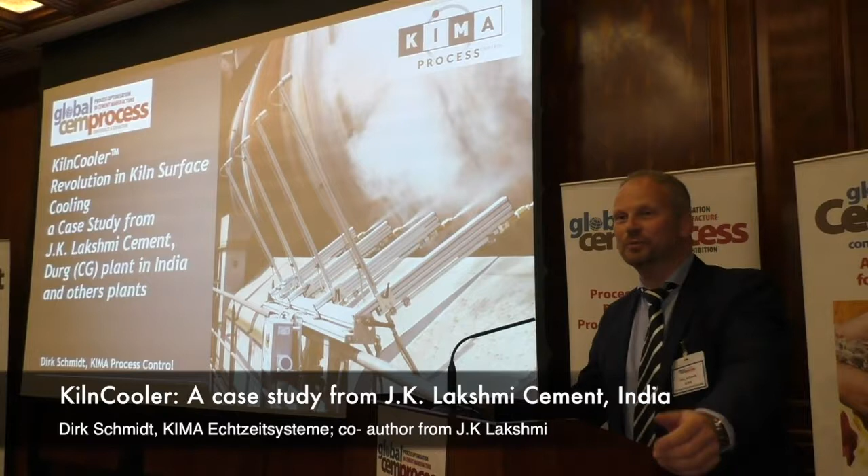Good afternoon. I could wake you up after such good food with my ideas to design wine cellars. I could imagine that would be much better and more interesting, but instead I try to make another revolution.

Very short: who is KIMA Echtzeitsysteme? Thank you, Rob already introduced us. We will be named, starting just next month, not KIMA Echtzeitsysteme anymore, but KIMA Process Control. The reason is simple: Echtzeitsysteme means, in English, real-time systems. This is, of course, a functionality of automation and control, which is good. But if you have 98% export in your company and none of your customers can explain what your name means, it makes sense to change it after 22 years.

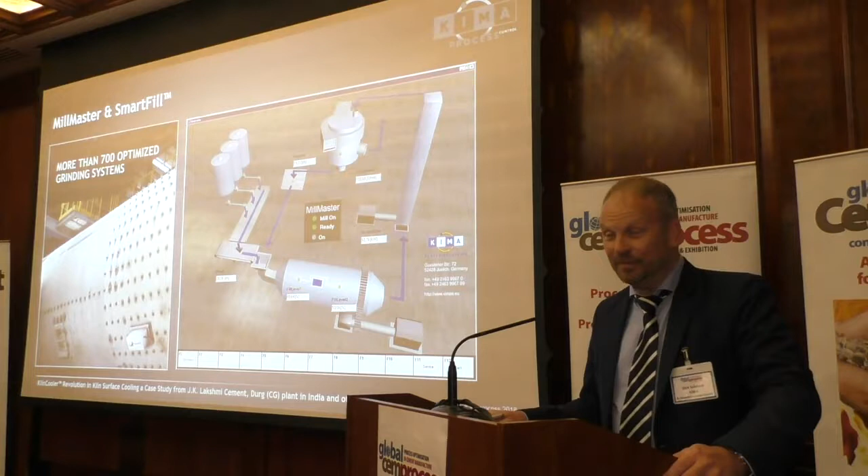KIMA is, of course, well known, as KIMA Echtzeitsysteme so far, for mill optimization. Mill optimization is the core competence we have had over decades in our house. More than 700 optimized ball mills are the result of a very successful software development called MillMaster. MillMaster is one of the software solutions we designed from a software package called Smart Control. Smart Control is mainly based on digital filters, predictive models, but also fuzzy control. We believe in this most robust, advanced process control and still offer it very successfully to the cement industry.

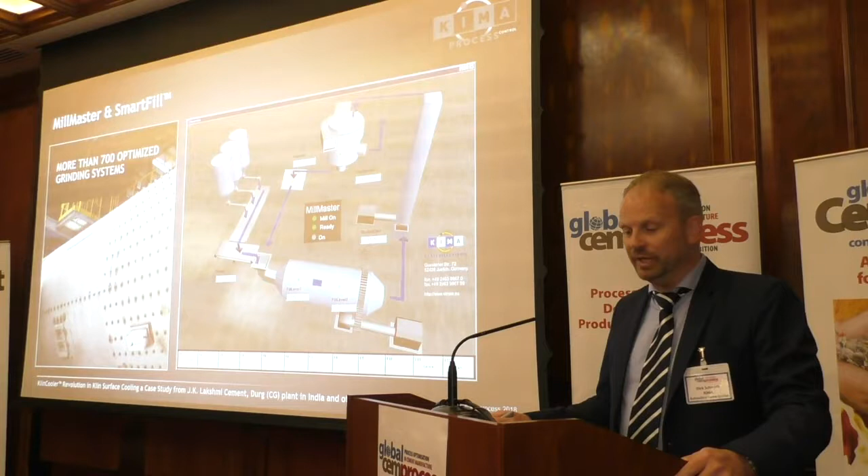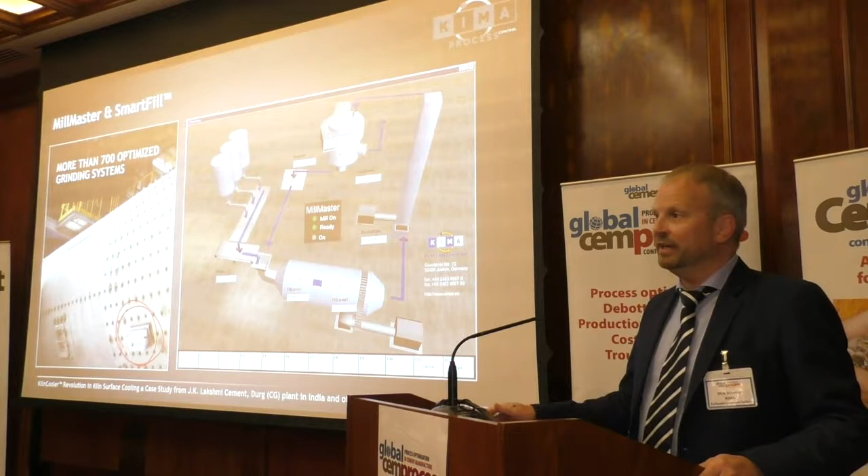We also had the necessity to design new sensor devices. Why? Yesterday we learned from ABB that soft sensors are here and used. Soft sensors are only as good as the input information again. So if you are able to design, based on a new physical function, a better signal, better information from a process, like we did with these smart fill sensors you see here, which are installed on the mill body itself, then you get much more reliable, precise information about what is going on in the mill. We have calculated and shown in many places that the smart fill electronic ear is 10 times more accurate than conventional microphone systems. This was only the introduction of our company.

Coming now to a thing which is obviously happening in more and more cement plants in the world: the introduction and implementation of alternative fuels, AFR.

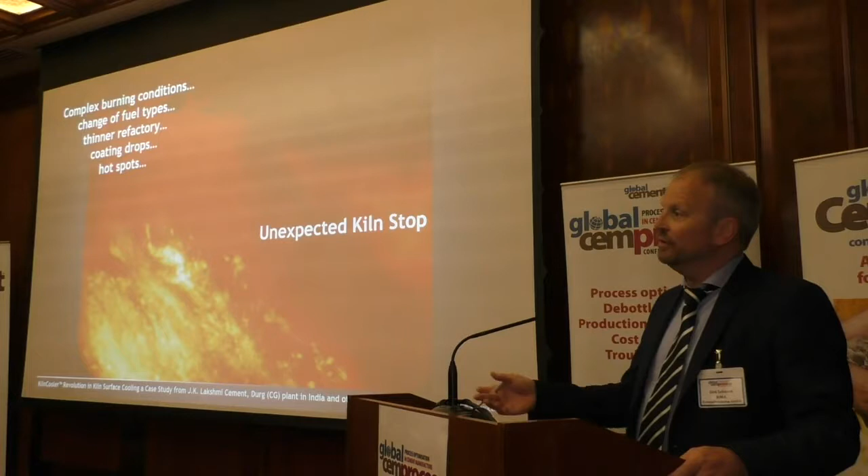It begins with complex burning conditions. If you change the fuel types and change your burning zone behaviors, it often happens that, at an earlier stage than expected, the refractory material becomes thinner. At this moment, the people in the plant are fighting with coating drops. Why? Because the flexibility of the kiln increases. You don't have this stability, this corset of bricks, in your kiln anymore. And then, with these coating drops, you create hot spots, not even red spots yet—the hot spot comes before. I speak about temperatures below 500 degrees, and I will explain why.

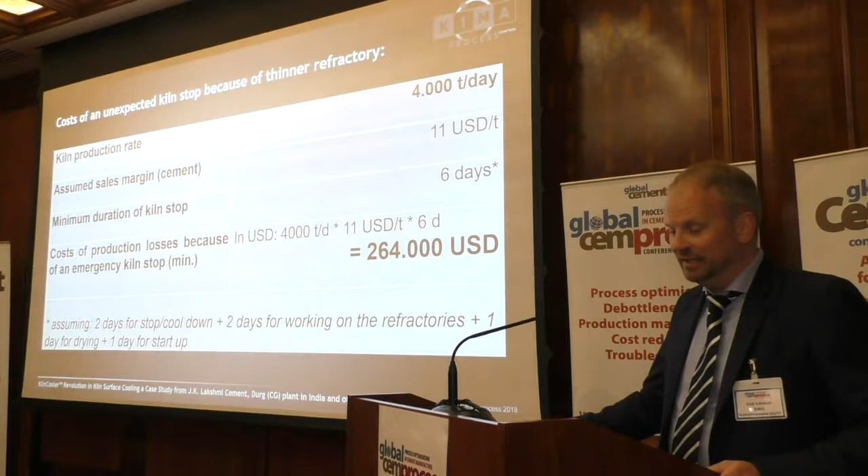If it is above 500 degrees, or even 470 depending on company rules, you are fighting with an unexpected kiln stop. Because if a brick falls out, you are not able to operate your rotary kiln forward—you have to stop it to prevent damage. Such an unexpected kiln stop creates costs, and the main cost is, of course, lost production. With a production rate of 4,000 tons per day and an assumed sales margin in cement of $11 per ton, an emergency stop of around 6 days—or even just 4 days is enough—means we're talking about losses of production of at least $250,000.

However, today, to avoid such unexpected kiln stops, plants are using huge fans, and these fans are everywhere. To protect against thinner refractory, when these electrical fans are in operation, you must fight with very, very high power consumption—I will give an example calculation in the next slide. The other disadvantage of fans is their noise. In Germany we have plenty of plants which are coming closer and closer to residential areas.

The houses come closer and closer to the plants. That, by the way, was the reason that Heidelberg Cement in Ennigerloh, the plant in North Rhine-Westphalia, in conjunction with the German Cement Producers Association, VDZ, decided to contact KIMA Echtzeitsysteme to develop a solution for that.

We did, and I would like to bring you exactly this on the point. What is more efficient than an air fan? Of course, it is water. But water on a very, very careful basis. What we do here is not artificial intelligence, it is artificial rain.

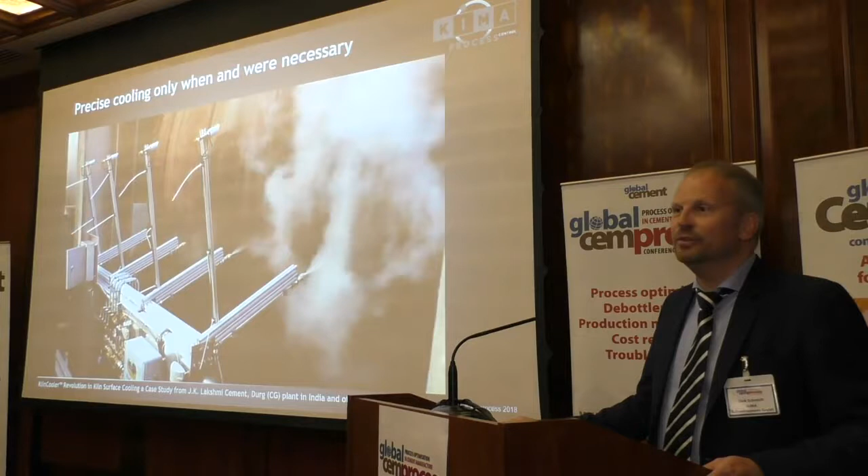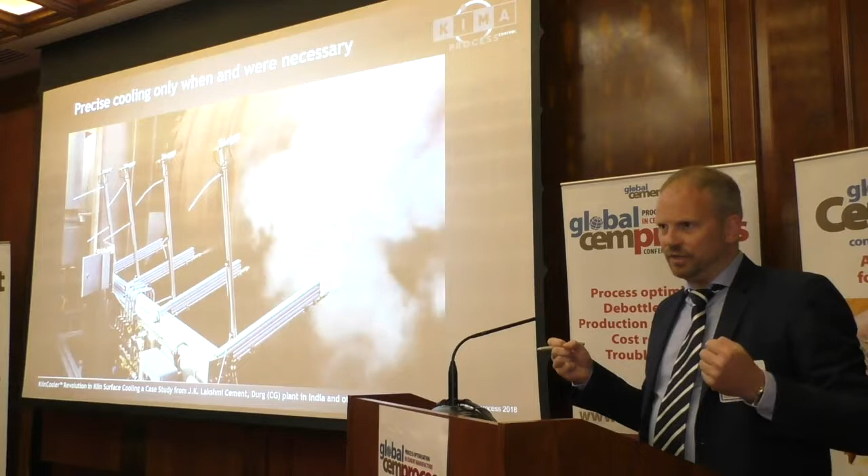We make a very smooth water mist, and this water mist creates on the surface of the kiln nothing else than what we have as humans as sweating on our skin. The water touches the iron and completely evaporates. Only in this moment can we take out the energy. So we want to touch, but with very thin drops, smaller than 1 millimeter.

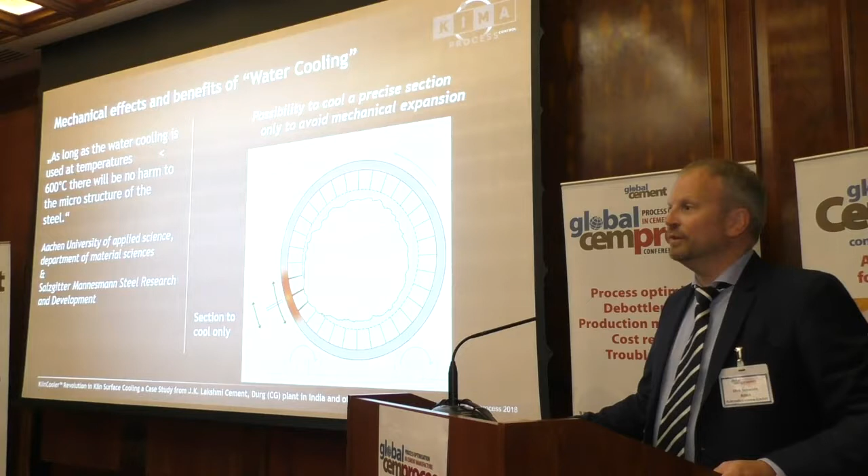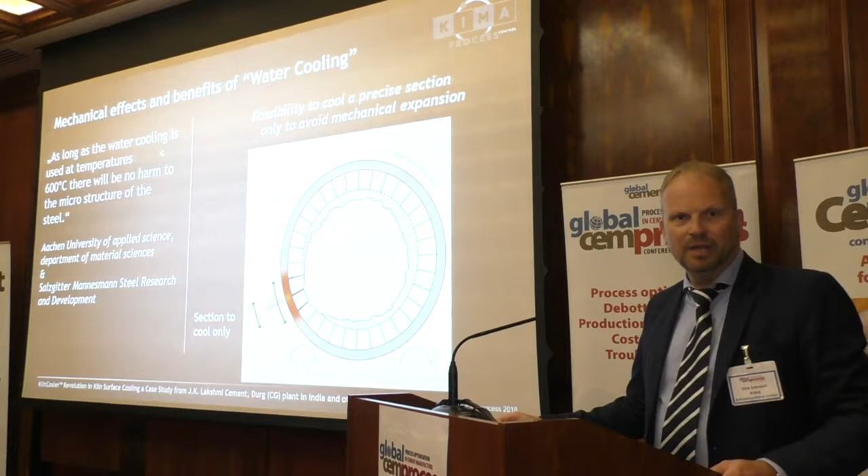This technology offers us a big step, because it first measures the temperature of the kiln shell, so that we can cool only where necessary. In comparison to an electrical fan, this gives a lot of new opportunities. As long as we operate under temperatures of 600 degrees, we are working here with a controller which does not open the magnetic valves over 500 degrees, only to be on the safe side, so we don't cool red spots.

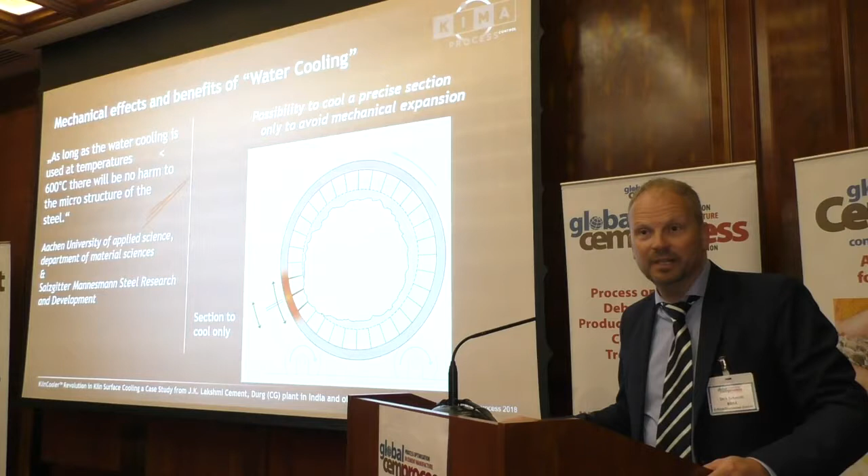You can't make anything wrong. The microstructure of the steel will not be harmed, because I don't know if somebody of you has done mechanical education during your engineering - there was this horrible iron-carbon diagram. I hated it, really. It's everything.

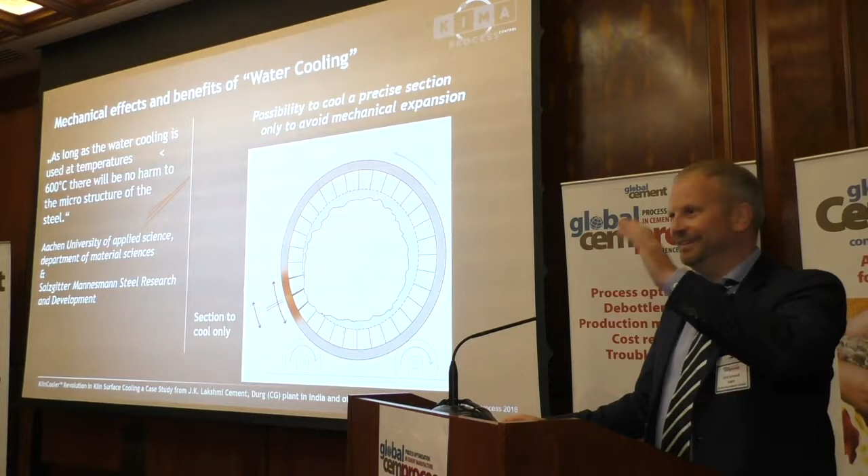Everybody must go through this door. But think about the curves which are there. You know all these names? I forgot them. However, the movement of these curves starts at 640 degrees.

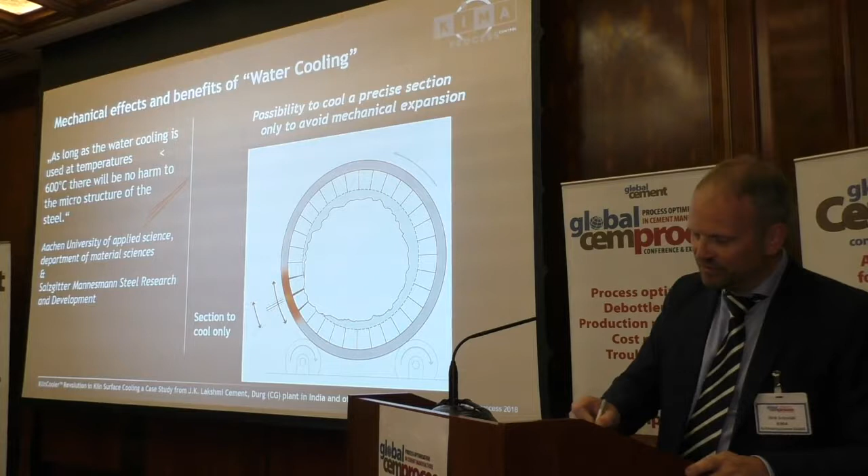Below that temperature, one of the famous German steel producers, Salzgitter Mannesmann, told me, you can cool your kiln with everything - with oil, with water, with air, it doesn't matter. No cracks, no harm, nothing. And whoever says that, it is a stomach feeling, it is not proven technology.

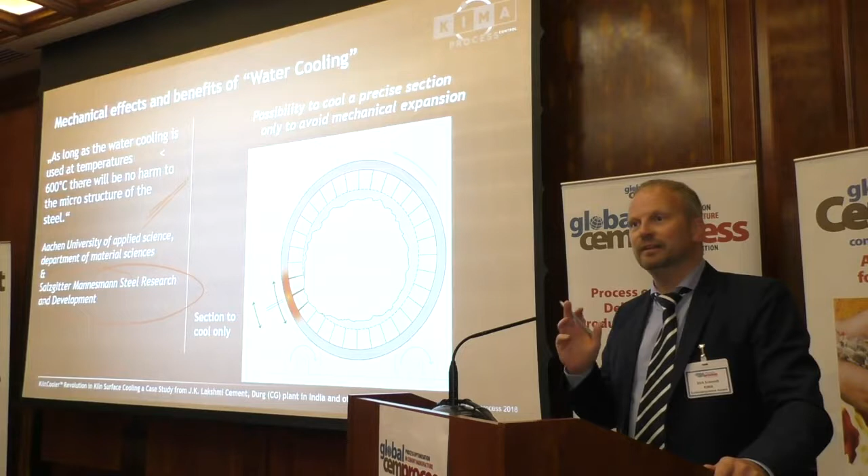We are engineers, and I hear much too often, 'this is danger for my kiln.' Absolutely wrong. So we designed the system more carefully. We don't want to shock cool it. We don't want to cool as fast as possible.

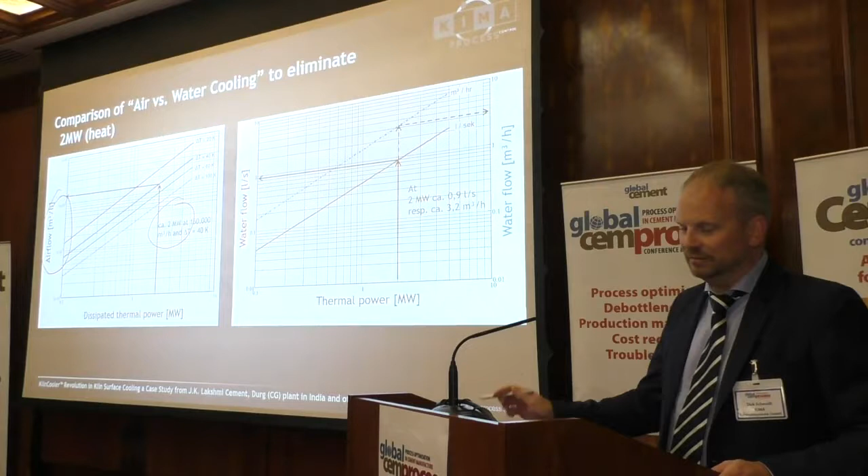If you want to sufficiently cool a kiln shell, we have taken only the air amount which is needed to cool 2 megawatts with a delta T of 40 Kelvin. You need 150,000 cubic meters per hour of air to do so, and you need at the same time 3.2 cubic meters of water to have the same cooling effect, in 1 hour.

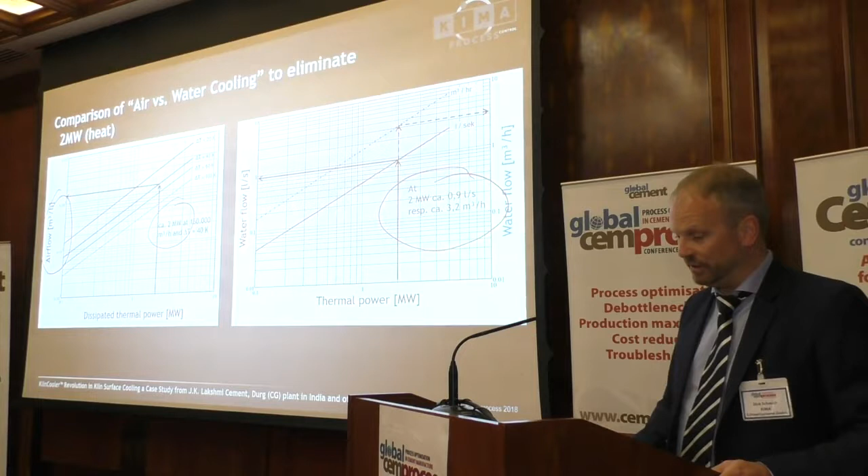Let us make it easier. If you have a kiln shell section of 1 meter and you want to cool it down 40 degrees Celsius, you need an air blower of 10 kilowatts. This produces 3000 normal cubic meters of air. It has a noise of 105 dB. Try to imagine how loud this is.

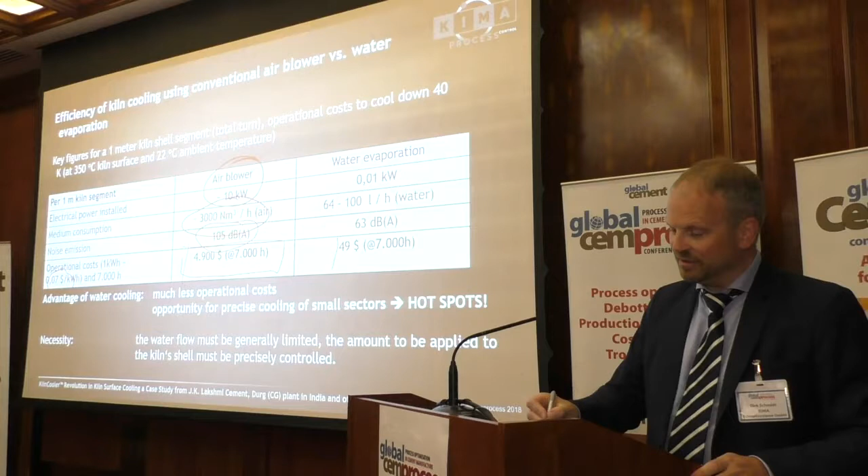I make the comparison now based on $0.07 per kilowatt hour. These are operational costs of $4,900 per year for 1 meter. You could do the same with $50, because the amount of power we need for this controller is 10 watts. However, the main issue is, of course, that the noise emission is much less. Don't forget, noise is logarithmic. So this is a fundamental change in noise.

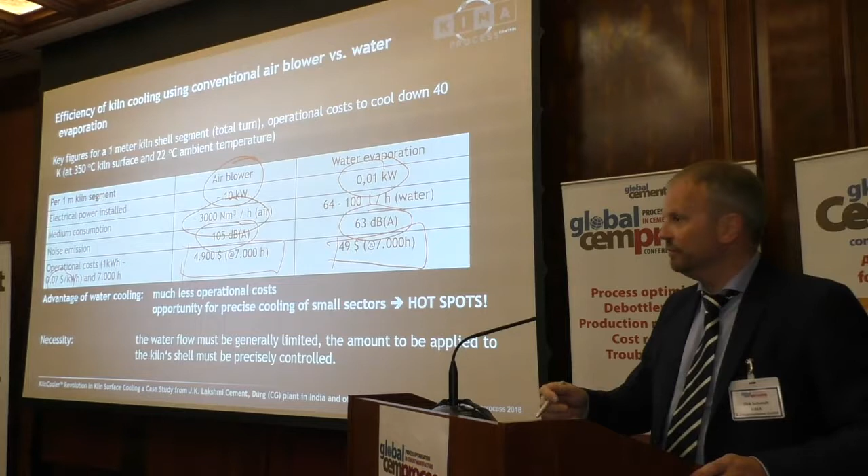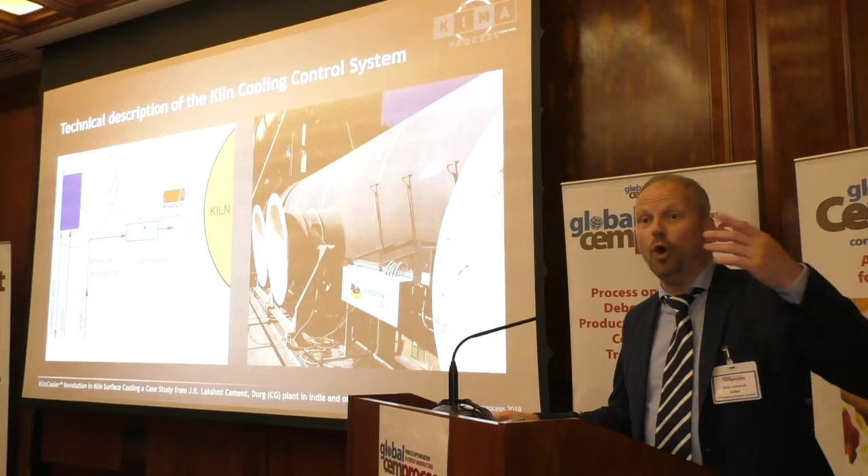We need 60 liters of water for this, and we do it with a control loop. That means the amount of water I've described so far is the maximum, when the system would cool the entire circumference at all times. So you can calculate that it is less than 30% of what I have given here.

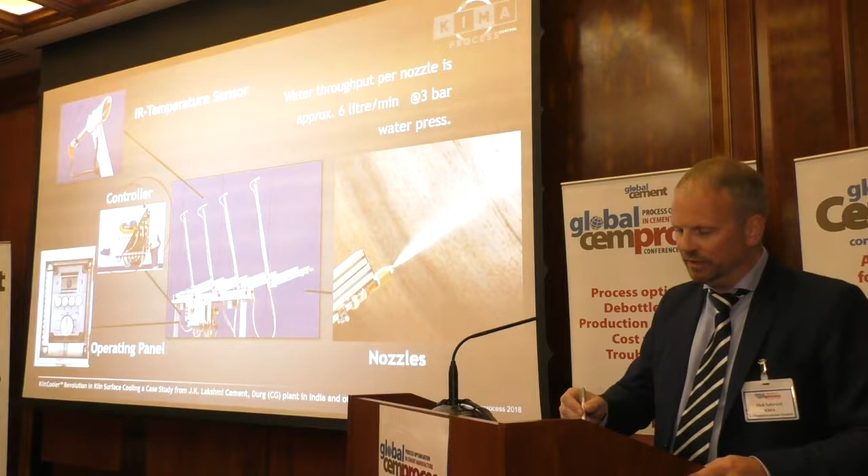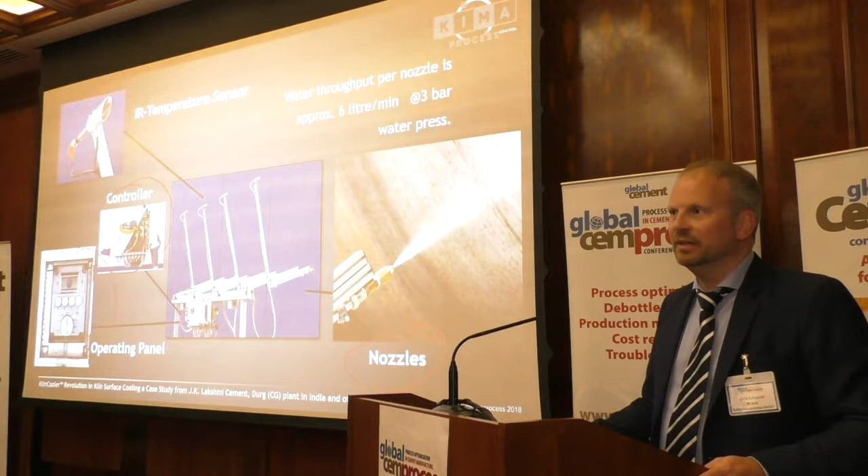However, the system has infrared temperature sensors, there is the controller, there is an operation panel, and there are water nozzles. What we need is 3 bar of water pressure. We don't atomize the water with air - only the water pressure is enough. If you don't have 3 bar, we say always make a basin at 30 meters at your preheater tower, then you have 3 bar.

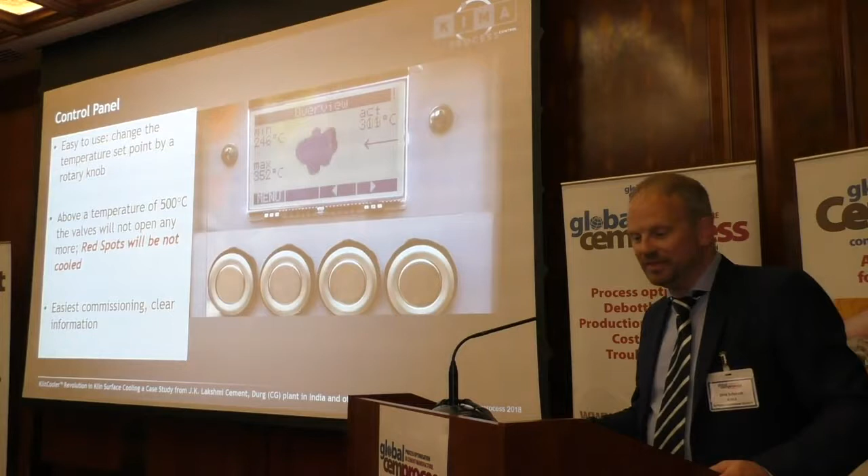So now this absolute easy handling. By a rotary knob, you adjust your target temperature, which must be below 500 degrees Celsius. This is done very easily when you see in your control room your line scanner.

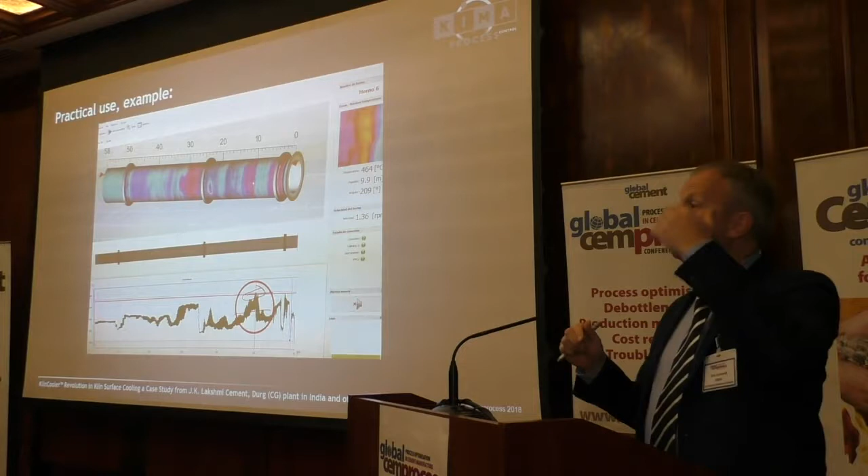So now where do you bring this system into operation? As I said, when it comes to the end of the production campaign and your refractory becomes thin, you easily go where you have high peaks or a high delta T. What does a high delta T mean? On this circumference you have had some drops, so you have specific areas which are more heated, others less heated.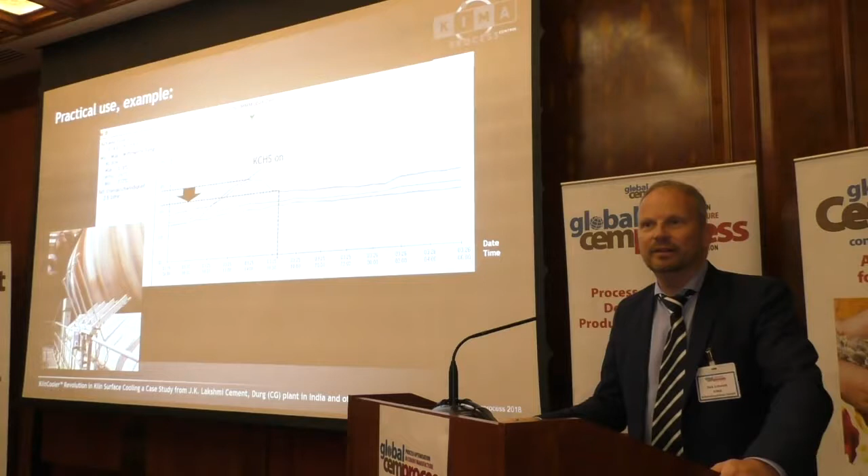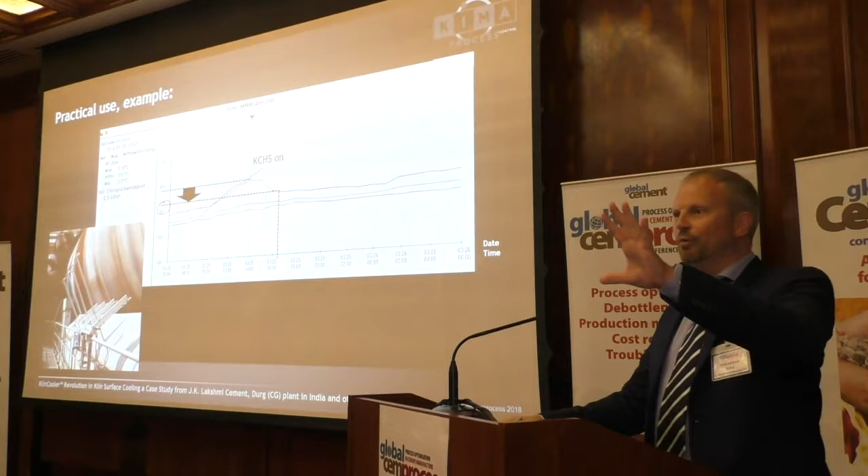In the next picture this is very easy to see. Over a couple of times the temperature in this region was increasing and increasing. So the operator said to his maintenance team, please move the kiln shell cooler to, let me say, 13 meters, adjust the target temperature here to approximately 330, 340 degrees, and the system is now spraying whenever this temperature is reached and above, not below.

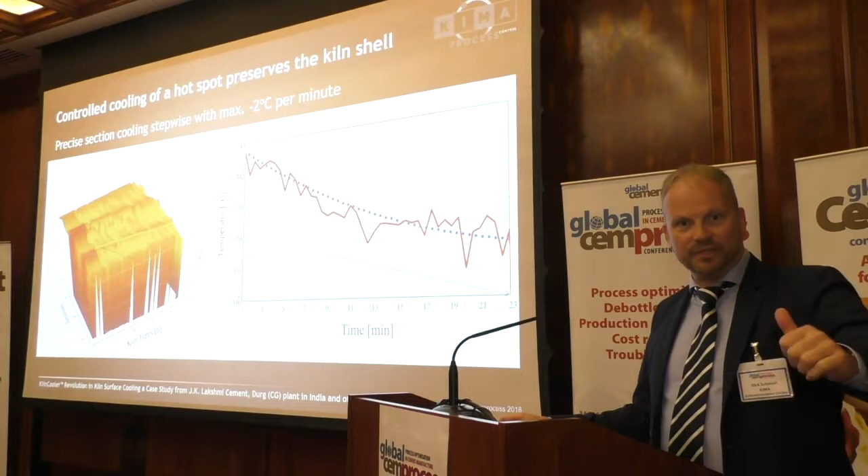The effect is, compared to an air fan I'll show you later, that only this hotspot will be cooled. Another function in our controller is that we cool maximum 2 degrees per minute. Again, we have time. We don't want to shock cool, or rush it. 2 degrees per minute means a very stabilized situation for steel, refractories and new coating development.

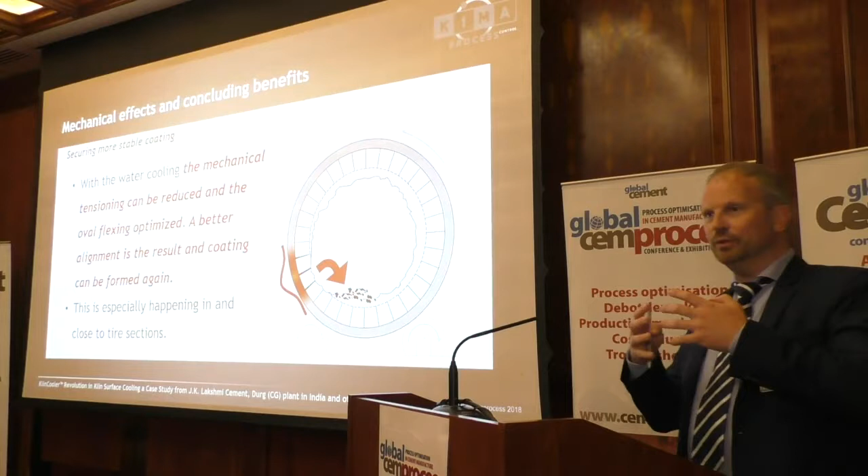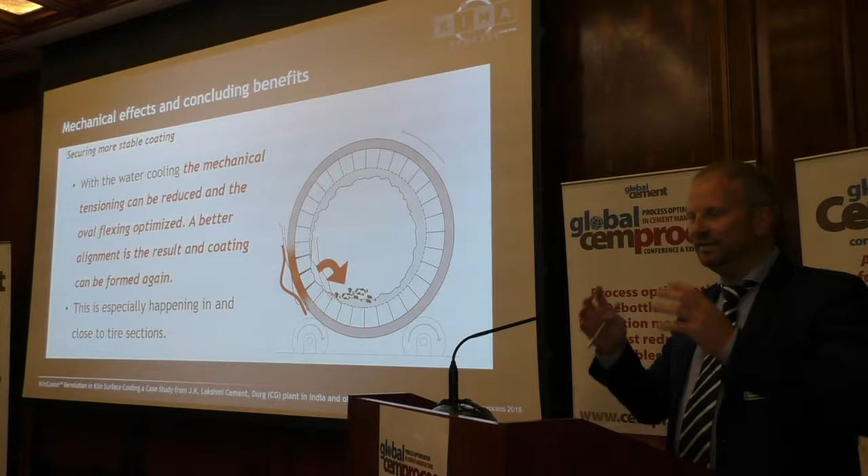So the mechanical tensioning, what you usually have when this hotspot is there, will be compensated, nothing else. I show it to you here. When you bring this bubble, let me say this expansion of steel, back into place, you will have a more stable situation. When this steel expands, the bricks become loose.

When the steel is cooled from outside, it will shrink. So it is like a clamp for the bricks. So you have more stable bricks again, and that gives the opportunity for new coating formation.

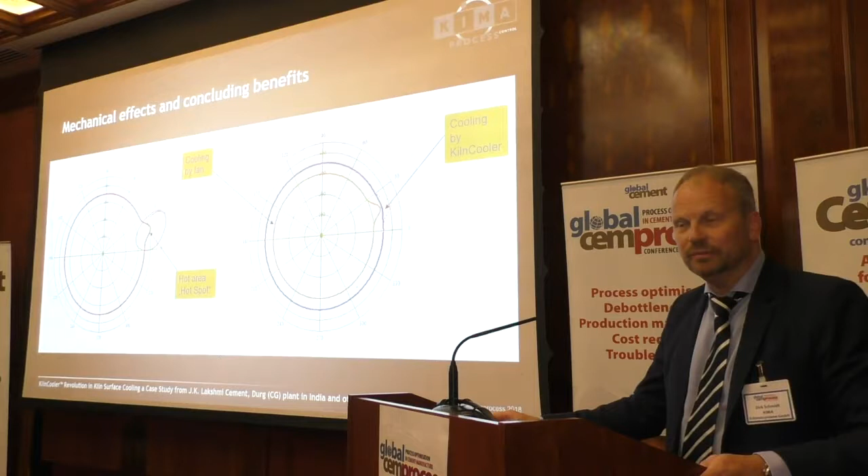Now the comparison, what would be with air and what would be with water. On the left hand side, the red circle, you see again our small hotspot. Conventionally, you would go there now with an air fan. What would the air fan do? It would permanently cool. With this permanent cooling, you turn this red curve into this blue curve. You shrink the entire kiln and you still have your delta T.

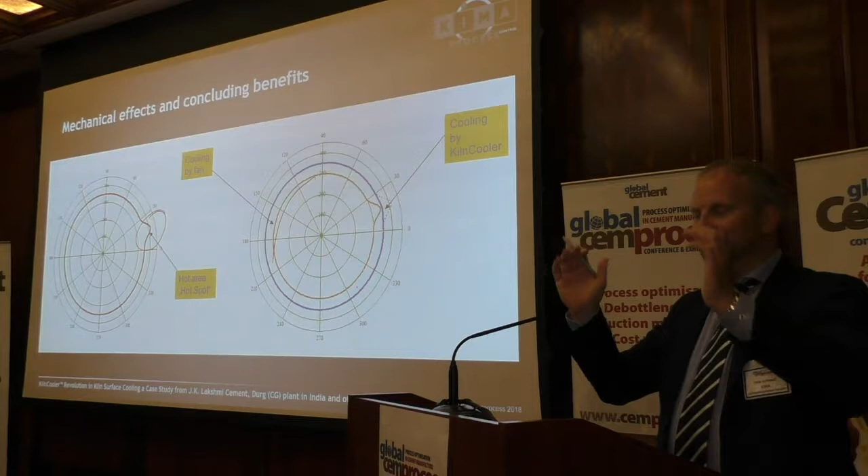In comparison, with the KilnCooler on the hotspot, it cools only this part of the kiln. So it pushes inside, if you like, this bubble, this effect, and brings down the delta T.

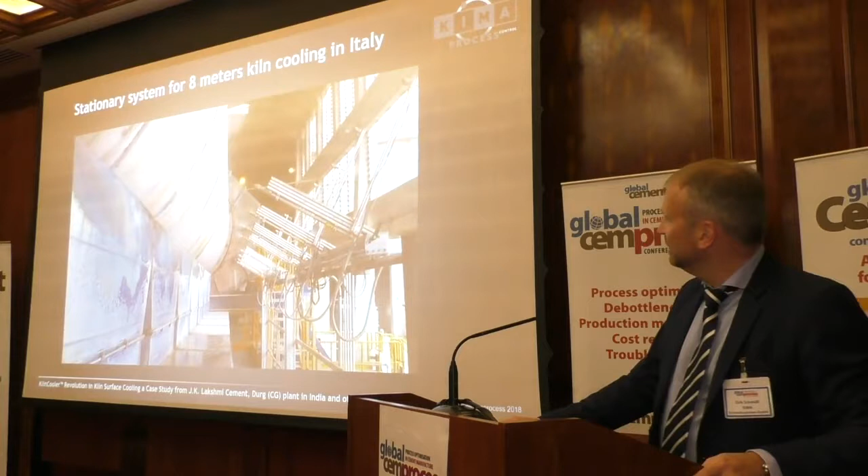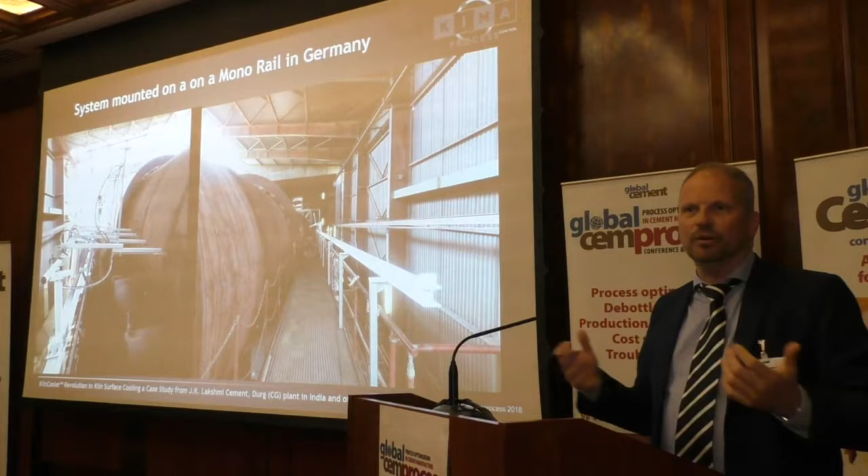This customer believes 100% in this technology. Another plant is using this, again, an emergency or mobile system to move it wherever necessary, easily, on a monorail. Very nice solution.

What happens with your kiln when you spray water with a bit of limestone inside on your kiln? It becomes white. Wherever you see a zebra kiln, the KilnCooler is in operation. We have designed and painted a lot of kilns in the meantime, 30 globally.

So 30 installations globally are the success, and I can tell you that I got this morning an order for the first KilnCooler now in the Arab region. It will be installed in Dubai at JK Cement. Why? Water is very limited, of course, also in these desert regions, but the effect, what you can do to prevent unexpected kiln stops, is so highly valuable that also these customers are jumping onto the train.

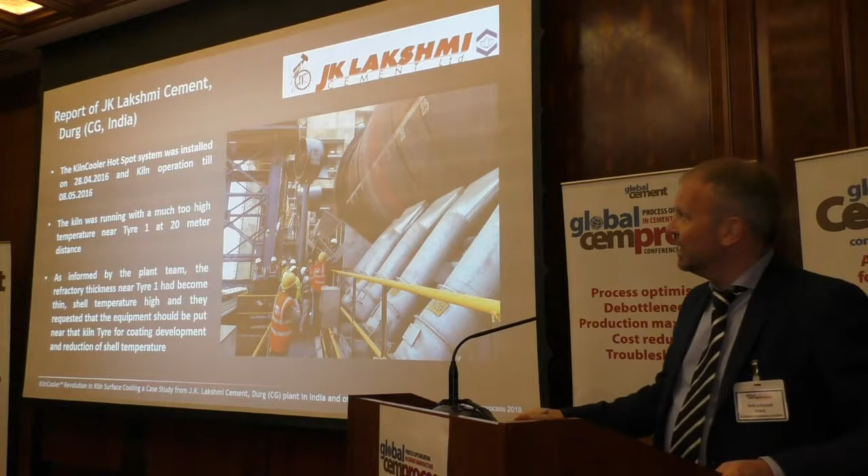I give you an example now, as reported also in the catalog, from JK Lakshmi Cement, done already in 2016, when the kiln was running on a much higher temperature near tire 1 at 20 meter distance because of very thin refractory. The plant team said it had become very thin and they had to do something there.

However, we installed the system, and now let's see the temperature screen before we started the system. We have here a temperature of 397 degrees as peak. You see here on the thermoscan also these peaks. Just 1 hour after installation, we adjusted a set point, and that will be in the next slide always to see again, at 360 degrees, only to prevent this overheating. Nothing else.

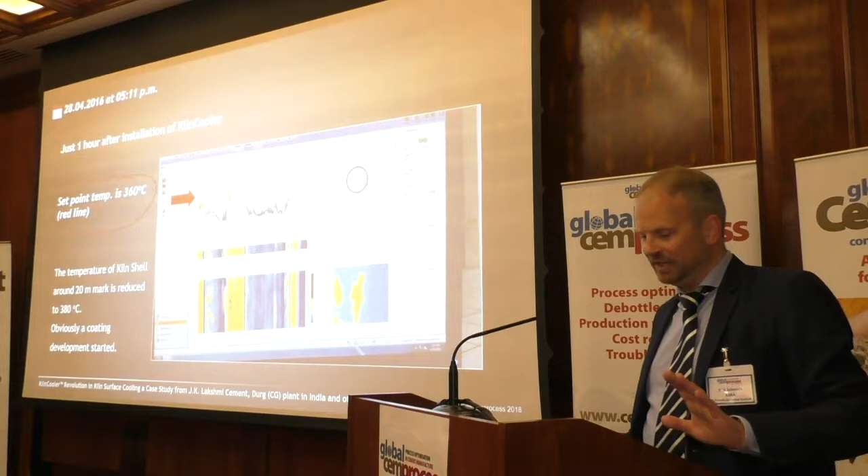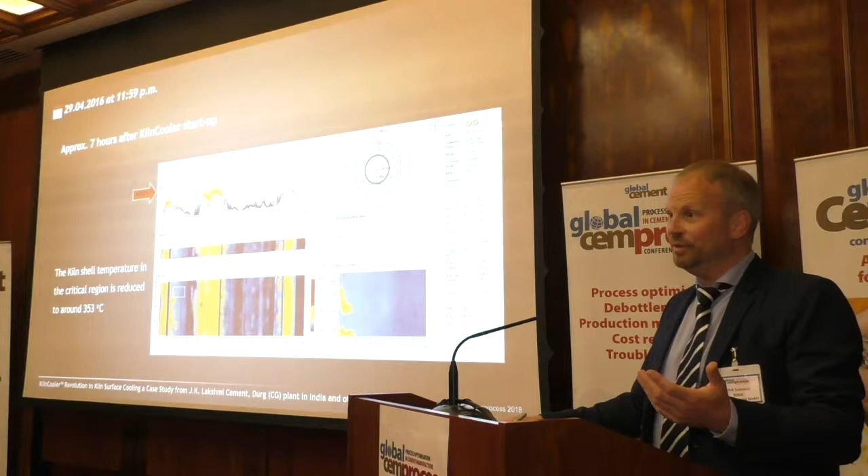So the plant had the necessity to run another 8 days in operation until reaching their regular maintenance kiln stop. With the pictures we saw earlier, they would have closed the kiln much earlier. Here the system gives them sufficient time to bring the maintenance people on site, to bring the right refractory on site, and to prepare the cranes and the kiln start.

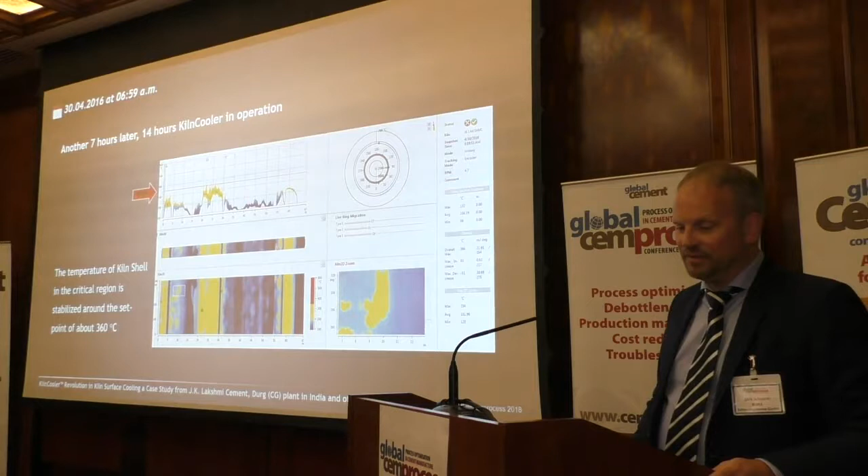So this was after 7 hours, this was after another 7 hours, so 14 hours, and this was after 2 days and 2 hours. First coating drops come again.

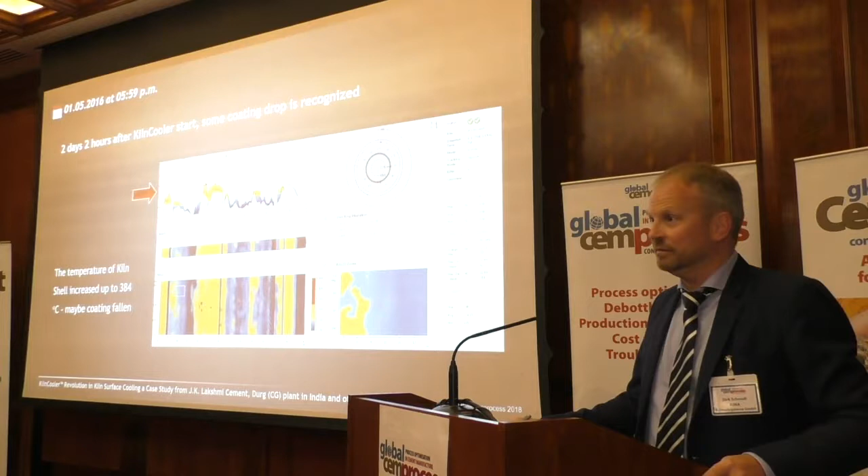Now, gentlemen, ladies, this system is not a miracle, it doesn't create miracles. We are not providing new refractory material into this kiln. This is impossible. However, we are able to give sufficient time and to prevent your kiln from damages.

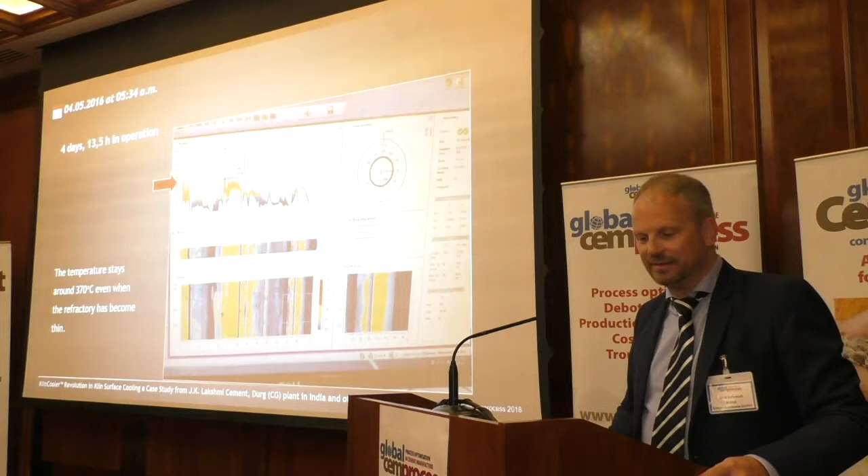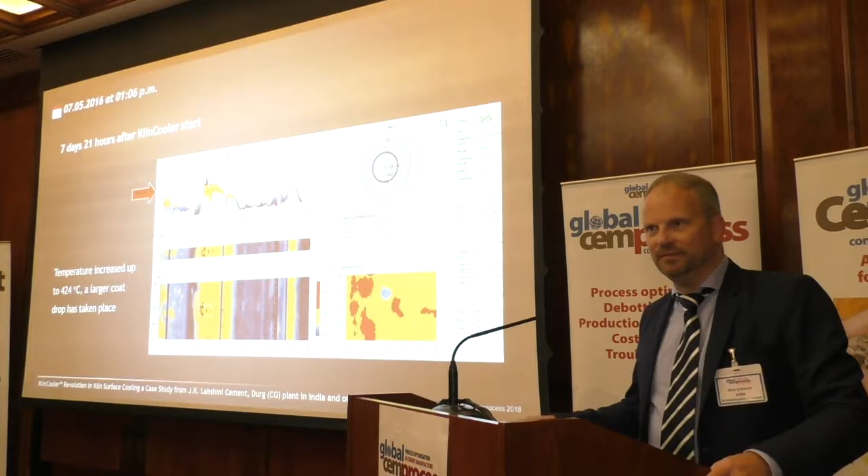So after 2 days and 18 hours, we still have these small peaks at 380 degrees, 380 degrees maximum after 3 days, 4 days, 5 days, 6 days. At the 7th day we have massive coating drops, and that's normal. At a specific time the refractory is gone, and then you can't prevent anything anymore, otherwise all the refractory material manufacturers would be very poor people.

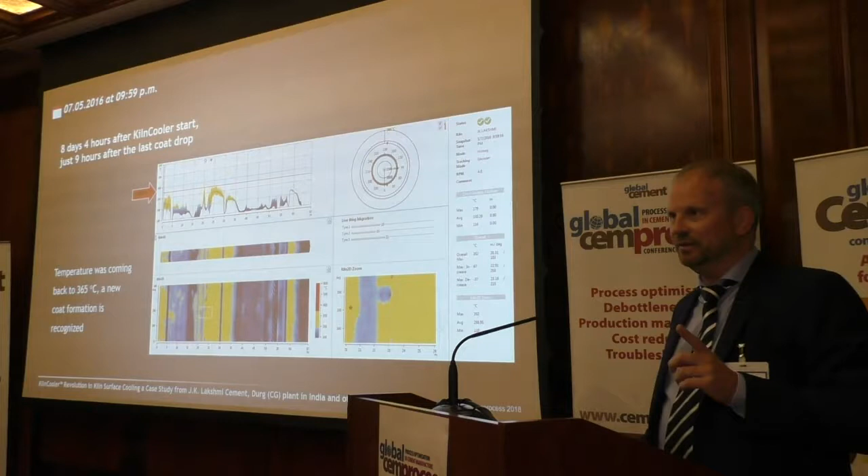In this moment, of course, the system was again able to keep operation under full production load. I must say, always under full production load.

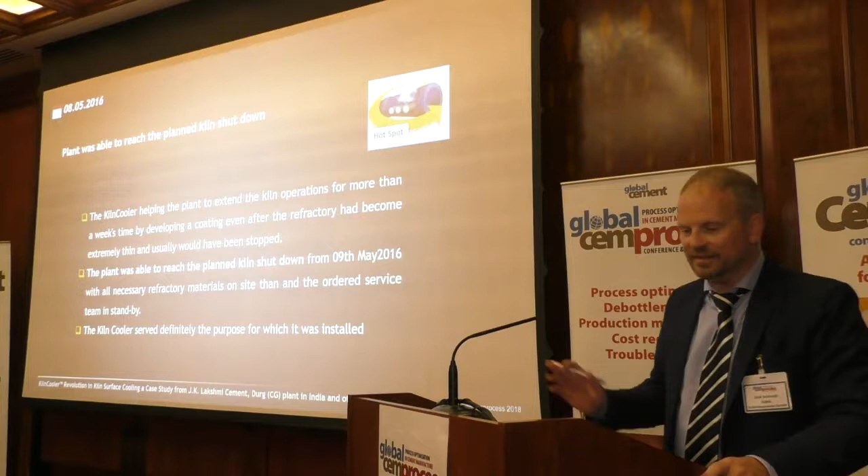At the end, after 8 days and 13 hours, the customer was absolutely satisfied and said the KilnCooler was helping the plant extend kiln operations for more than a week's time by developing a coating even after the refractory had become extremely thin and usually would have been stopped.

The plant was able to reach the planned kiln shutdown on the 9th of May with all necessary refractory materials on site and ordered services on standby. The KilnCooler served definitely the purpose for which it was installed.

At the end let me also show you some nice pictures from a recent commissioning in Colombia, at Cementos Argos. They have purchased the system as well. Here's a short video of this long dry kiln.

System in operation. You see very rarely the spray is only taking place where necessary, and that is the big difference compared to the fans.

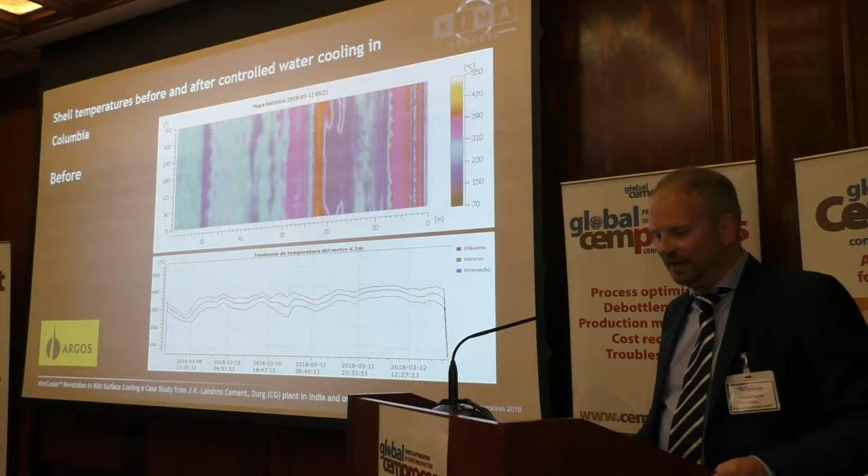This was one of their examples before installation. You see a relatively high temperature profile here. And when they switched on the KilnCooler, look, you see immediately the temperatures go down, and what you see here is exactly what we saw yesterday from advanced process control.

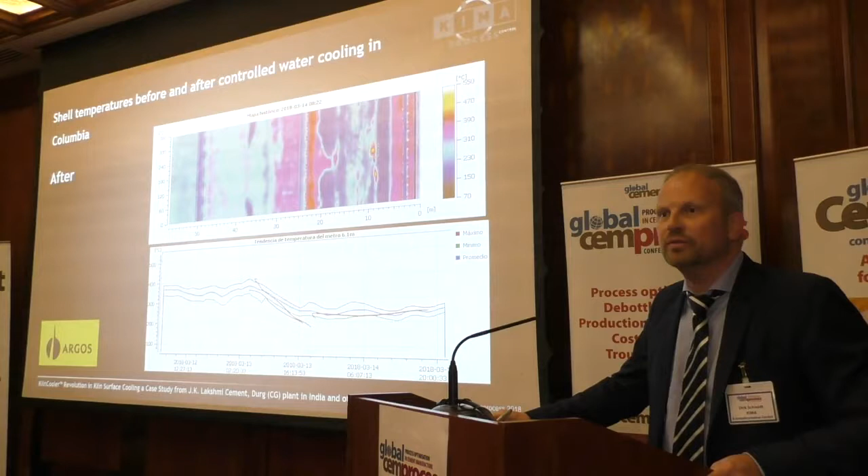This is, of course, something unbelievable and never seen before. We control the kiln shell temperature.

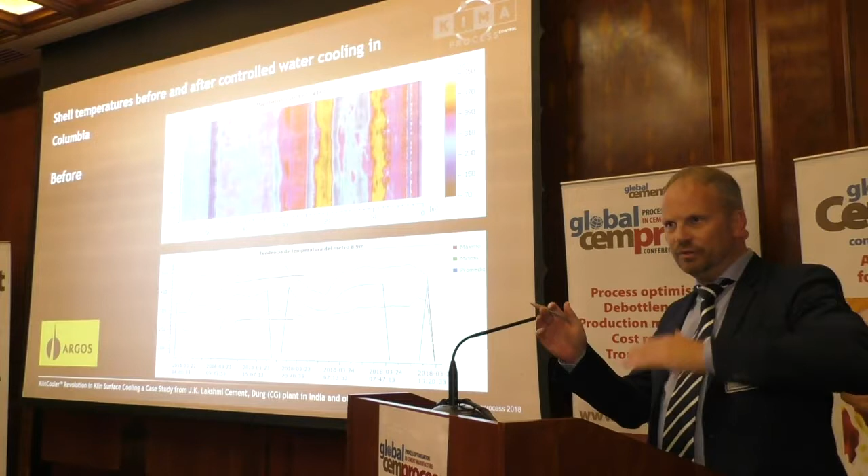The next slide shows very high temperature variations on one kiln segment, low temperature and high temperature very far apart from each other. Now look what the KilnCooler makes out of that. I think these are impressive pictures, impressive also for the future.

The customer said immediately, the KilnCooler helped the plant extend kiln operation for more than 1 month by promoting coating development in spite of the refractory thickness being less than nominal. The KilnCooler definitely served the purpose for which it was installed.

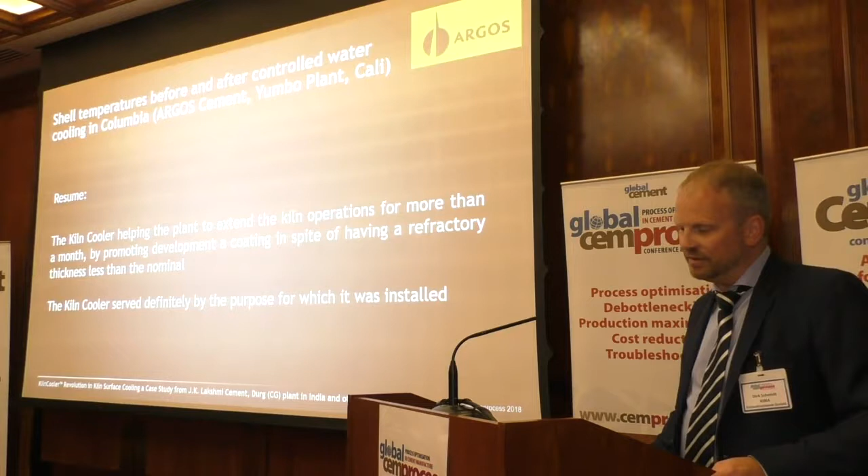I say thank you very much. I hope you are as happy as Ivan. Ivan is the mechanical engineer at the Yumbo plant in Argos, and you see he has brought the KilnCooler into operation here. He was absolutely satisfied. I can tell you, if you are an engineer like me, a sales engineer, technically oriented, fascinated by new technologies, and you get such a picture by WhatsApp from your customer, this is success.

Thank you very much for your attention.

Thank you very much indeed, Dirk, for a nice presentation and for telling us all about the KilnCooler system. We do have a few questions that have come in, ones you left unanswered, possibly to allow people to ask them. The first one is: what constraints do you have on water quality in terms of particulates? Can these cause nozzle blockages?

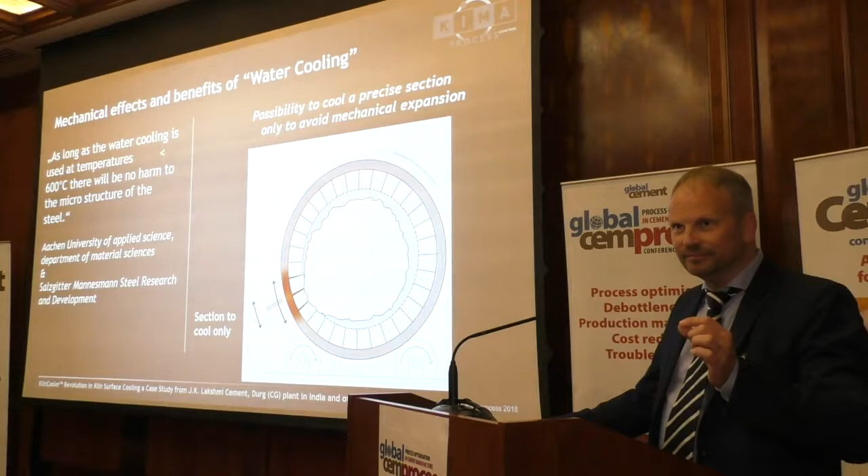The nozzle opening, the hole of the nozzle, is approximately 1.5 millimeters to give you a feeling. We have a particle filter in front, in the system itself, which prevents particles larger than 0.1 millimeter from passing. So we haven't had any effects so far. If you ask me about the necessary maintenance of such a system, it is exactly that: here and there you clean the water filter.

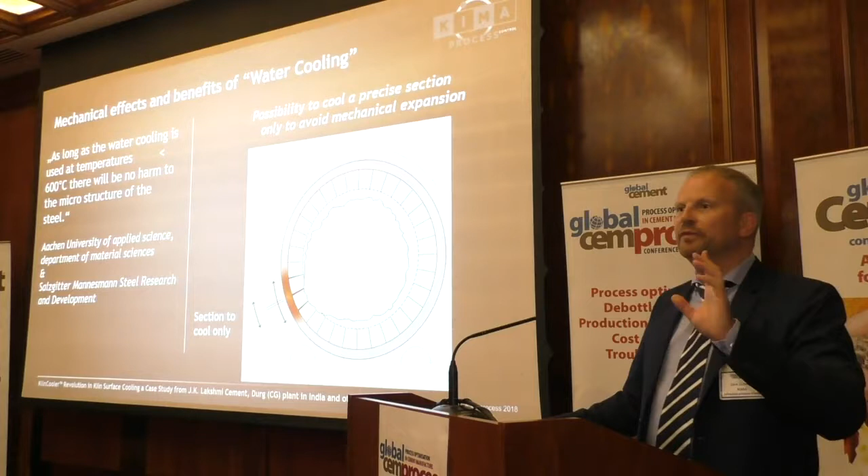Question from Anonymous: Is rust an increased issue for kiln shell maintenance when using water cooling? Definitely no. You must consider that we calculated that if the system were open 365 days a year, 24 hours a day, that would be less water than 2.5 days of heavy rain. Try to imagine that. So it's like a higher humidity of air, not really more water.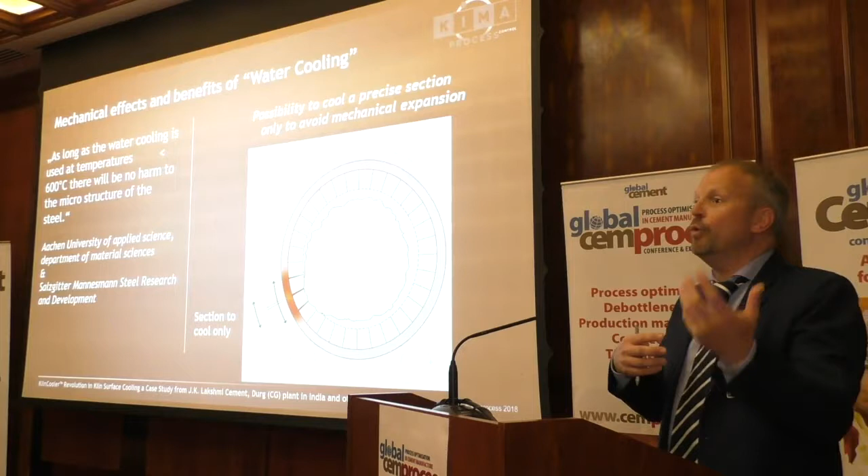Definitely no corrosion. What is the water consumption per kiln per year? That depends, of course, on the kiln and on the necessity, how many hotspots they have, how early they start. My recommendation would be not only to start with a system over 300 degrees. If you have a delta T of 40-50 degrees, even at 270 degrees, it means you have unstable coating over the circumference. So use it even at this point to have a more stable coating from the earliest time. I can't answer this question exactly, but what I can say is, if the system would operate full and permanent, which is not happening, we would speak about 6 liters per minute.

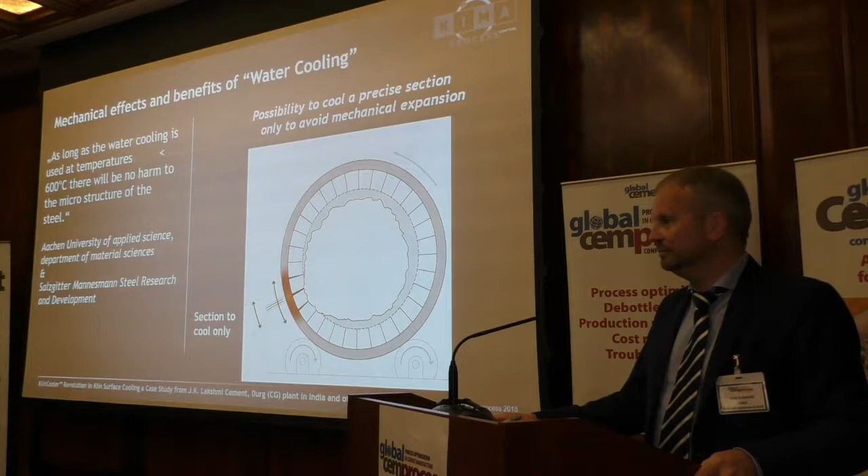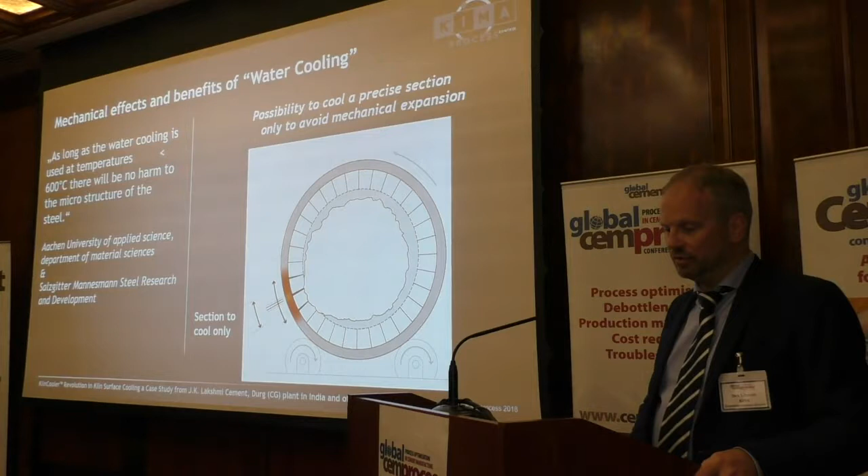Okay. Somebody's asking, how much does it cost? No problem, we can speak about that. Let me show the picture. This system, as you see it here with 4 units, has a cost of 50,000 euros. And 50,000 euros are easily recovered if you prevent 1 day of unexpected kiln stop. Only 1 day would pay for 2 of the systems immediately. I'll give you an example.

If you play with fire, with new fuels, whatever, you would always have your fire extinguisher close to you, right? I think such a fire extinguisher is an absolute need. If you start with alternative fuels in your kiln, you have no idea what will happen in the burning zone. In this moment, to have a fire extinguisher that protects your shell would be a good idea.

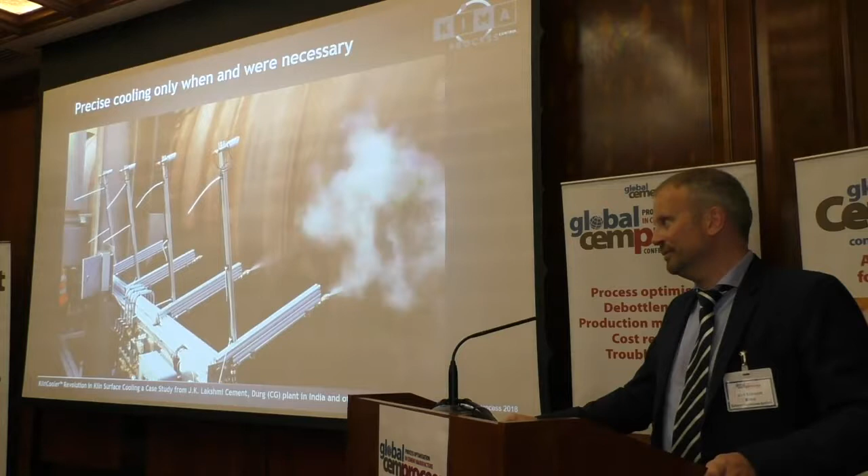Finally, somebody asked, is there a copy of this presentation on the USB stick, as the one in the conference notes is slightly different? It is. I wanted to show you really the latest experiences, that is why I moved it along a little bit. If you want a copy of this original one, come to my booth, you will get it.

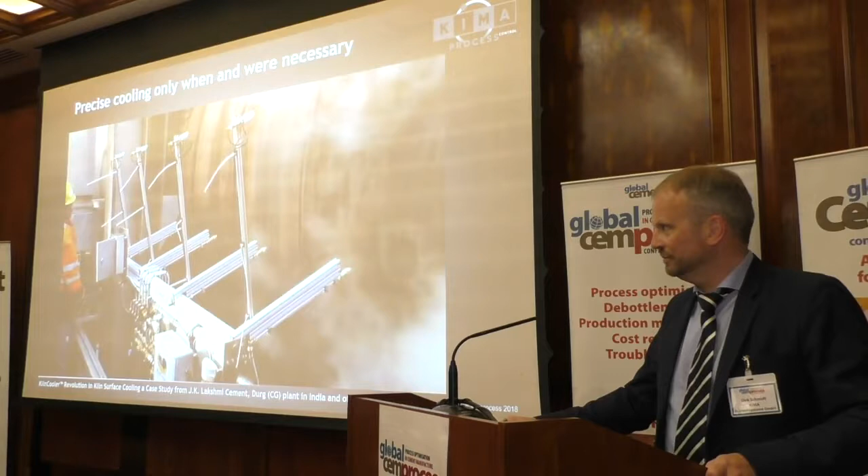Excellent, excellent, great. Bring a USB stick, please, then. Well, you can bring the one that's in your conference bag, so you will definitely have one.

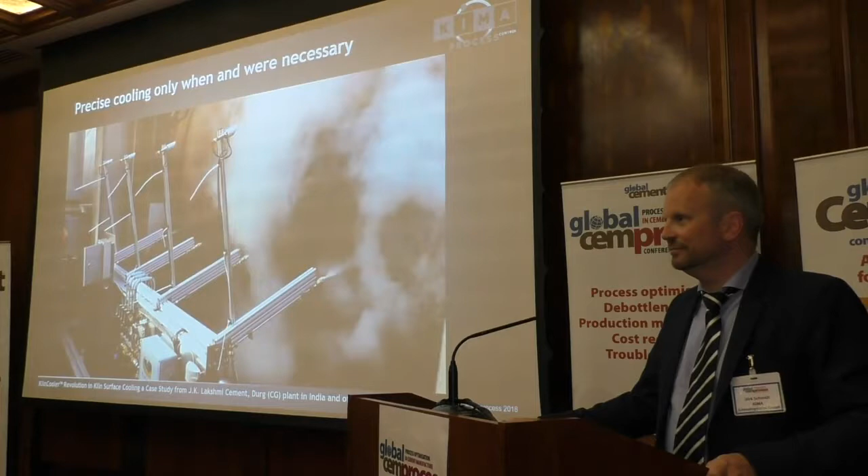Any questions from the real world in the room? Okay, in which case, let's join together and thank Dirk Schmidt. Oh, sorry. Oh, yes, please go ahead.

Sorry, simple question. What length of the kiln have you covered with that 4-spray system? 2.5 meters. Each nozzle has a distance of half a meter, so we cover approximately 2.5 meters with one of these units.

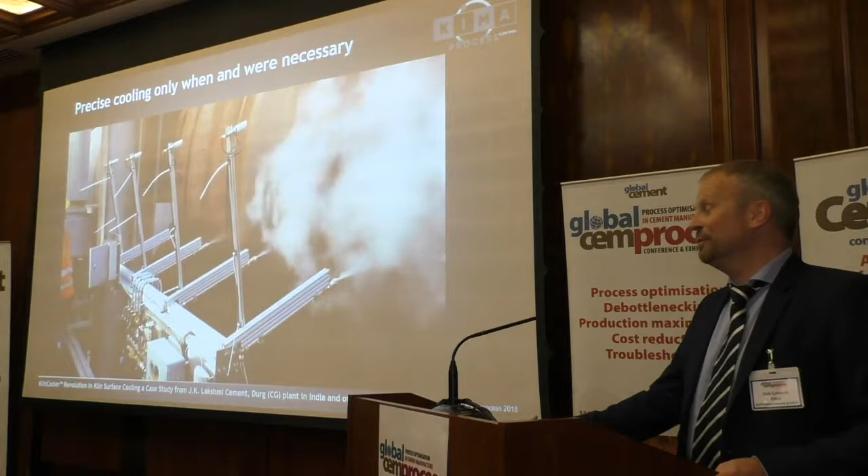The criteria they used to position that was their trouble spot. Yes, I can understand the sliding system, but then you can't cover 2 trouble spots with one system. Not with one system, then you need 2 systems. But let me drop this information also: the stationary system is much cheaper. It's much, much cheaper.

So we designed the system in the meantime per meter. Let me drop this information also because I think it's interesting: there is already the next generation, and this next generation of the KilnCooler spot hot system is worldwide patented, by the way.

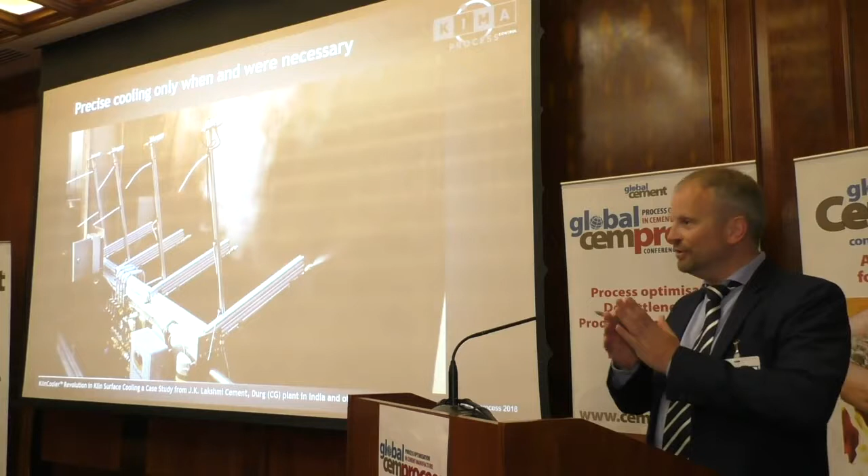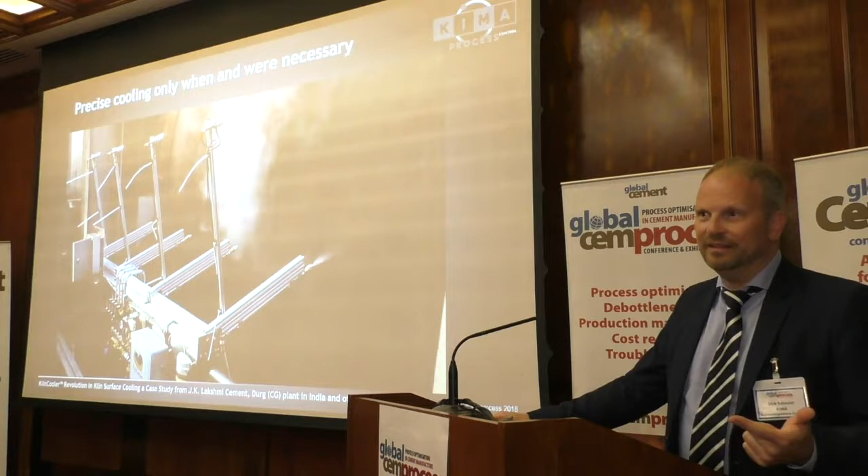Underneath this optical sensor which measures the temperature, there will in future be a laser distance measurement. With this laser distance measurement and a stationary cooler provided over the complete length of the kiln, you have the temperature profile, you don't need your thermoscanner anymore. And secondly, you will have the ovality of your kiln per half meter.

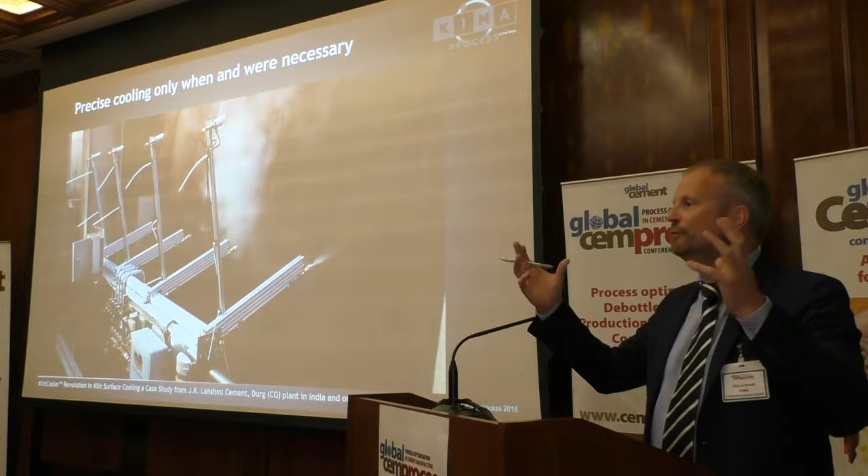Now try to imagine what that means in future. It means wherever you have a coating drop, the system will immediately work. Wherever you have a misalignment, the system can be programmed to make this realignment fully automatically with the hot turning kiln. This is the future. Maybe next year? Not next year, it will take, I would say, at least 5-6 years.

Okay, let's see, one more. Last one. Have any of the kiln designers installed this from you? Please again, kiln designers? Any of the kiln suppliers have installed this from you?

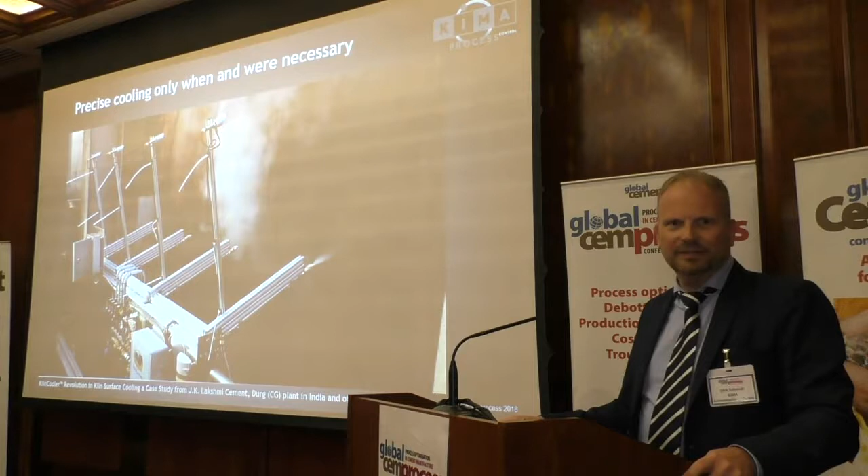No. Why? We prevent the kiln from being damaged. These kiln suppliers, of course, are happy to sell one kiln section or another, and they are more happy to sell kiln sections maybe with rollers. I have no idea. So far there is a big conflict, as I said in the beginning, in putting water onto this hot iron. But I think we will solve that.

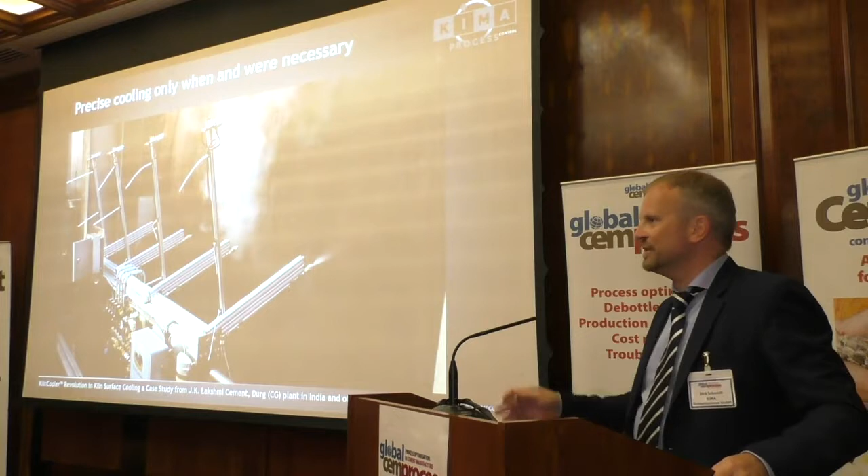By the way, very interesting, on LinkedIn last week I had a very interesting discussion when somebody posted a picture from Japan. You know how the Japanese cool their kilns? Since 100 years, with water spray. But without control, they do it continuously.

Okay, we're going to hold it there. Once again, Dirk Schmidt, thank you very much.